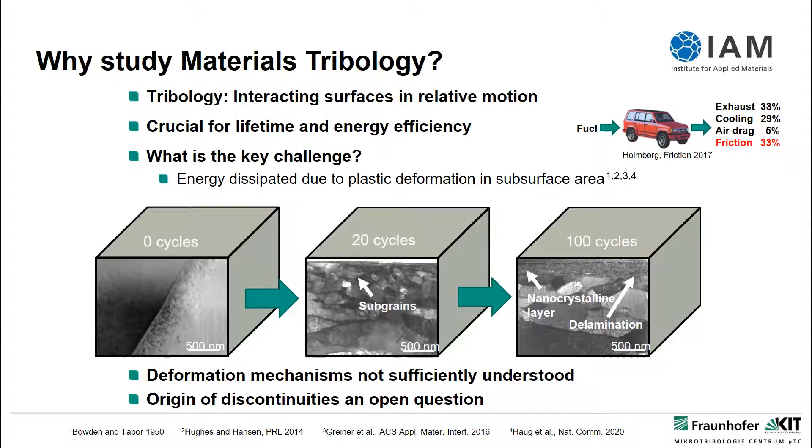So we have a sapphire sphere which is in contact with high purity copper. It's an unlubricated contact. We control the environment it is in. What I will show to you today, it's all in 50% relative humidity air at room temperature, and we do a really mild tribological load. So we have a sphere which has a diameter of 10 millimeters, so 1 centimeter, and a normal force of 2 newtons, which equals a nominal Hertzian pressure of 570 megapascals.

And as I'm sure a couple of you have already seen, actually a while back, by performing experiments like this, we stumbled upon the following phenomenon. So what you see here is a cross section. We are now looking from the side into the wear track, basically, right? So here's the surface, and this is where the sliding is happening. And our sample preparation method is such that we electropolish our copper samples after annealing them and grinding and polishing them. There's electropolishing steps, so we have a very, very low defect density structure to begin with.

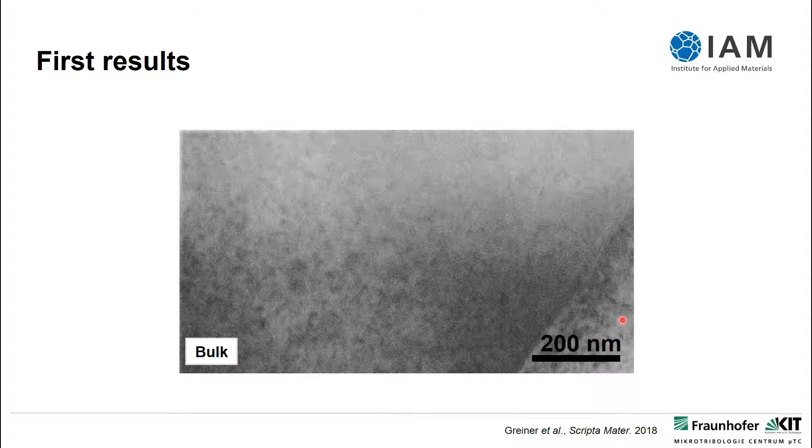And now if we just slide the sapphire sphere once, in this case now from right to left over the sample, the following is happening, as you can see here. We'll just do this again. So let's slide again. So the sphere is coming in. And this is now the TEM foil after the experiment, after just one trace. And you can see this discontinuity here in the microstructure. There's this dark contrast, which is horizontal to the sample surface.

And as I'm also sure a lot of you have already seen in the past, so I will not go into too much detail here, we have figured out that what we see here is the self-organization of dislocations. So this line, if you use high-resolution TEM, results I'm not showing today, and if you really zoom in, you see that this is a structure which is made out of dislocations. That's why we call it the dislocation trace line. And it's really the self-organization of dislocations in the stress field of the moving sphere. And so I will actually show you a first idea how this might happen in a second.

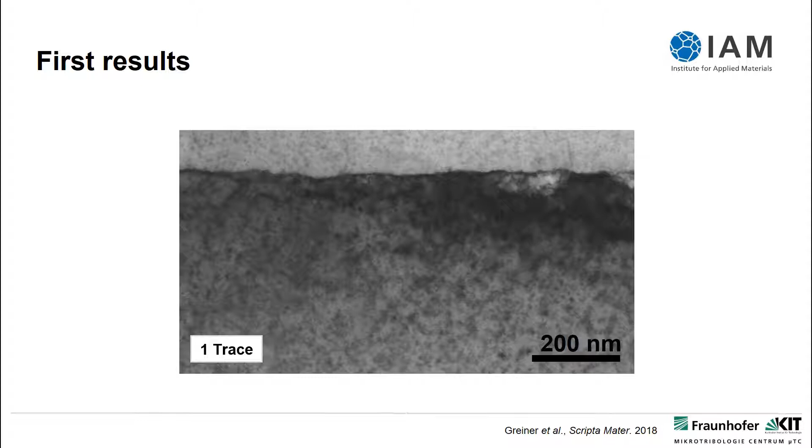So when we saw this for the first time, I was really puzzled by this. I could actually not believe it. I thought it's an artifact basically from the preparation, which it is not. It's not an artifact. We have reproduced this time and again. And if it's a mechanism, right? If it's a deformation mechanism, it should actually also be possible to see this in other materials. It should not be something that is copper specific. And that's something that we have quite a bit tested in the recent months and years. And so I want to show you 3 examples for other materials where we have seen this. So we have, for example, looked at copper manganese alloys, something we published in Acta this year.

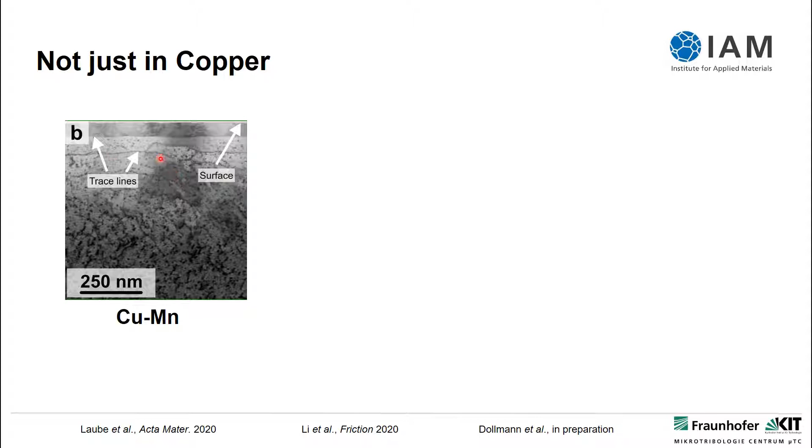And there we also see dislocation trace lines, actually several of them, but the trace line phenomenon is also there in copper manganese alloys. The same is true for copper zinc, in this case now copper zinc 5, where we do see the dislocation trace line. If we go to higher zinc contents and thereby lower stacking fault energies, the picture does change slightly.

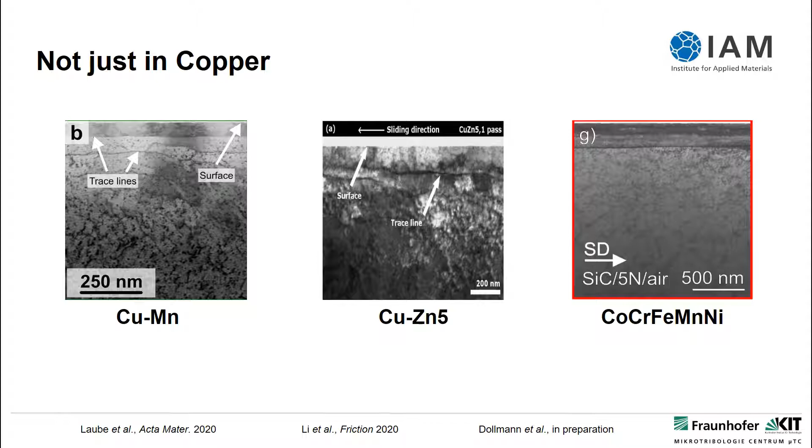And we have also looked at, for example, a high entropy alloy like the Cantor alloy, cobalt, chromium, iron, manganese, nickel, where we also see, here you can see it, a dislocation trace line, actually a really sharp, nice dislocation trace line. Here it actually heavily depends on the counterbody, but under certain conditions, when the plastic deformation is not too high, when we don't get a lot of adhesive wear, we do see a dislocation trace line. We have also looked at BCC materials like iron or tungsten, and also there we do see this dislocation trace line phenomenon.

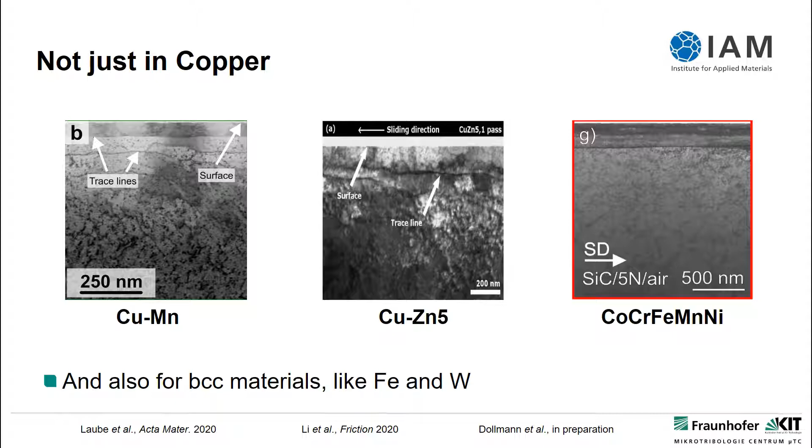So it seems to be really a mechanism that you can find at least in a certain range of stacking fault energies in other materials, not just in copper. So the question might arise, well, why is this happening? And I also would like to give you here what our first idea is into this phenomenon. That's something we developed together with Lars Pastewka. And again, because it's something that we published 2 years ago, I don't want to go into too much detail. I want to have enough time for our new results, but I need to introduce this phenomenon for those of you who have not seen it yet, because otherwise it might be pretty puzzling.

So what's plotted here is the Hamilton, or Hamilton-Goodman as some people call it, stress field under the moving sphere, which is basically a moving Hertzian contact. And what we are looking at now is edge dislocations which are oriented in 4 different ways, either like this, this, this, or this. And the question that we are posing is, how are those dislocations reacting to the stress field? And we are looking at this component of the stress tensor, which is the shear stress in the XZ plane, basically, of the sliding sphere. It's really, again, this cross-section.

Well, dislocations like this will be pushed in front of the sphere because of the negative shear stress. Basically, the sphere is moving them in front of it like a snowplow, so to speak. Those dislocations here are moving to the right and are just following the stress field. Dislocations oriented like this will be pushed towards the surface and will leave the crystal. And the most interesting ones are these edge dislocations oriented like this, because they will be pushed down further into the subsurface material, but as sliding progresses, these dislocations will cross over the zero shear stress line, which is this solid line here, to the positive shear stresses and will be pulled up towards the surface again.

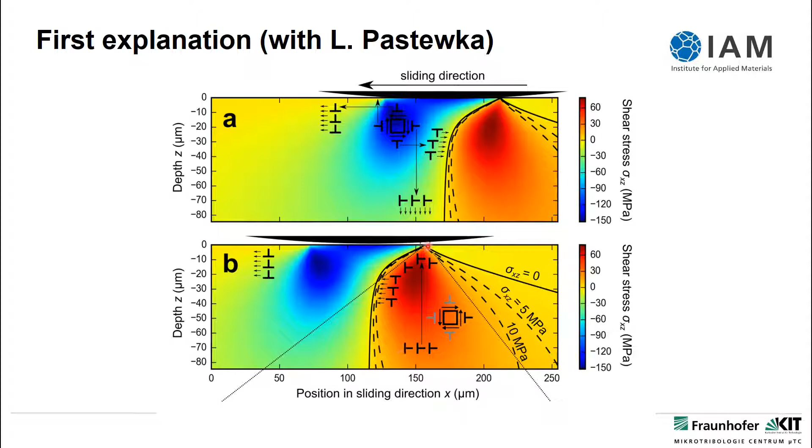All other dislocations we don't really have to look at. These are the really interesting ones. So what is happening to them? Are they sucked completely to the surface? And the answer is no, actually they are not. Because if you now see where, for example, an iso shear stress line for 5 megapascal is, you can see that the dislocations will not move completely to the surface because you need a finite stress to move a dislocation, right? And if you look in literature, actually old literature from the 60s, 70s, you will find that you need in really well-annealed copper a minimum shear stress of around 5 megapascals to move a dislocation. That's why we plot here the 5 and 10 megapascal iso lines.

And so basically what we are assuming is the dislocations are sucked up or pushed towards the surface, but not completely to the surface. So they will stop moving here, and that's where they will self-organize into this dislocation trace line. And if we look at the depth under the surface where this is happening, it's roughly 150 nanometers, which is also where we experimentally observed the dislocation trace line.

And so with this in mind, we posed hypotheses, if this picture holds true, if this might explain certain experimental results that we had seen. And you can read up on this in our 2018 Scripta paper. I don't want to go into detail now, but this very simple model, which for sure is not completely correct, I'm not claiming that, basically holds true for many of our experimental results. So we like it.

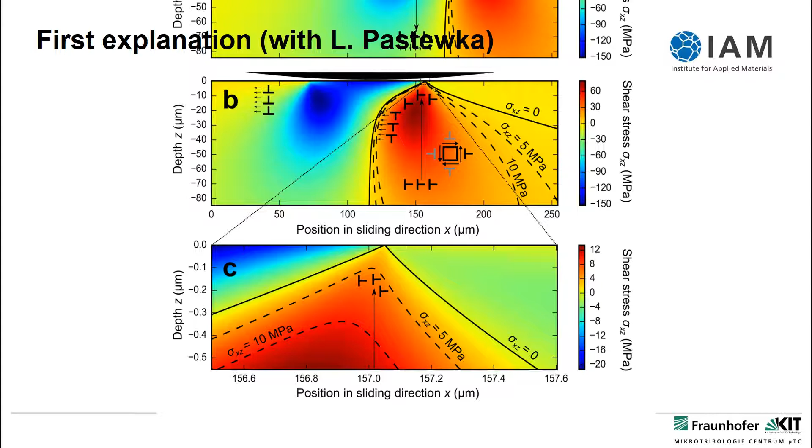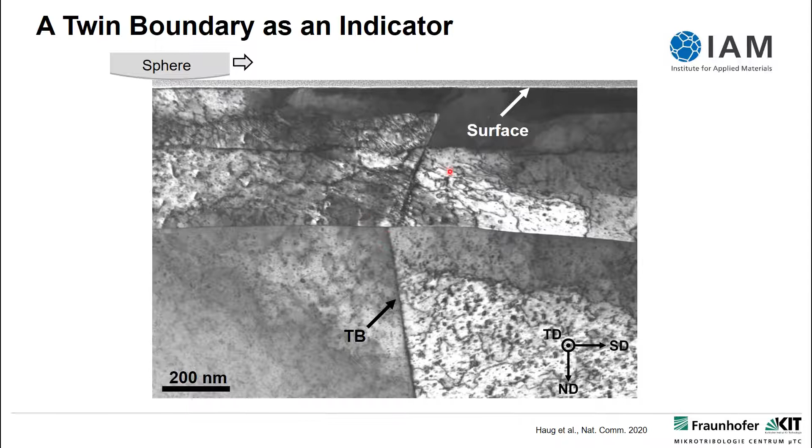But no more after the tribological load. After the tribological load, this twin boundary is tilted. It's tilted in sliding direction. That's what we can see here, to a degree of alpha. So we have tilted the twin boundary in sliding direction. We also see this dislocation trace line phenomenon, actually two, a lower dislocation trace line and an upper dislocation trace line. What else do we see? Well, we see that we don't just tilt the twin boundary, there's a step. We also shift the twin boundary.

And now what this twin boundary actually allows us to do is, this is something like an indicator or a silent witness to the processes that have happened under this one trace. Processes that, if we look at a structure without a grain boundary, as I have shown you before, we might have missed. So the question is, can we make sense of what we see here? Because this to us was really surprising. When we stumbled upon this, we were like, oh, what's going on here? We need to have a closer look, because this might hint towards mechanisms where we have so far only seen this mechanism for the dislocation trace line phenomenon, but perhaps there are actually other mechanisms at play.

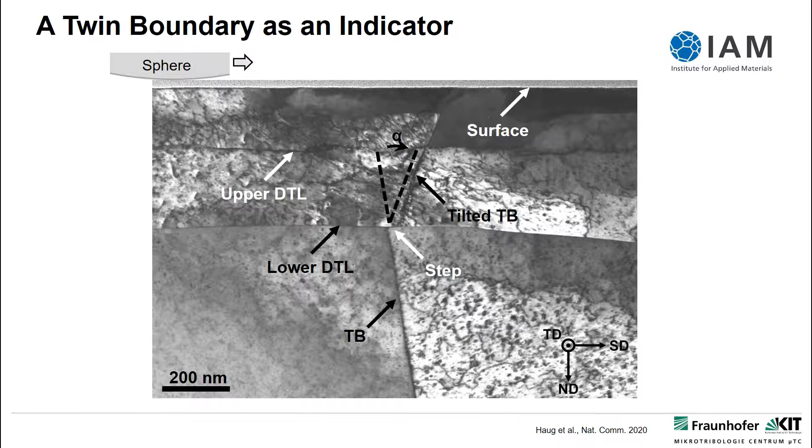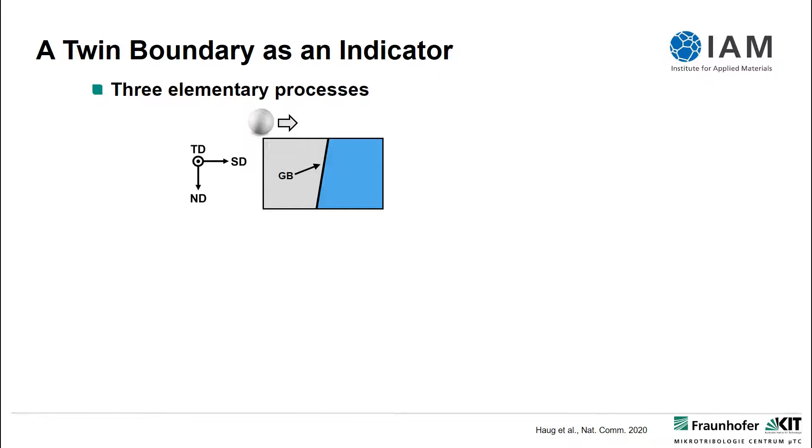And so what we can infer from this TEM foil, in our opinion, are three elementary processes. The first one is this tilt of the twin boundary. So there is a crystal rotation also accommodated in the transverse direction by the dislocation trace line. After the sliding, that's exactly what we see here. We have the dislocation trace line, and the material above it is rotated around an axis going in and out of the screen, in sliding direction. That's also something that we had seen previously and which hints towards the character of the dislocation trace line as a small angle tilt boundary. So this is the first process, and that's something we have seen in the past without the witness of the twin boundary.

The second one is what we call simple shear. So we shear the area of the material above the dislocation trace line. In this case, if we go back to the experimental results, above the lower dislocation trace line in sliding direction. So there's a simple shearing of this material, like a deck of cards basically.

Even though of course this is a dislocation mediated process, it's not a deck of cards, but you can think about it like a deck of cards that you shear in sliding direction. And this is what we see because of the tilt of the twin boundary. And then we have the step, which means that there's a highly localized shear happening at the lower dislocation trace line in sliding direction. So we move this whole material above the trace line in sliding direction. This whole deck of cards as a whole is now moved.

Well, what processes in the material, what elementary processes might be behind that? Well, the first one, so this formation of the dislocation trace line and this rotation around an axis perpendicular to the screen is something that might be accommodated by edge dislocations which have a net character like this, or more like this if we have a sliding from left to right. The second one basically are edge dislocations which are either oriented like this or like this, because they just pass through the material parallel to the sliding surface.

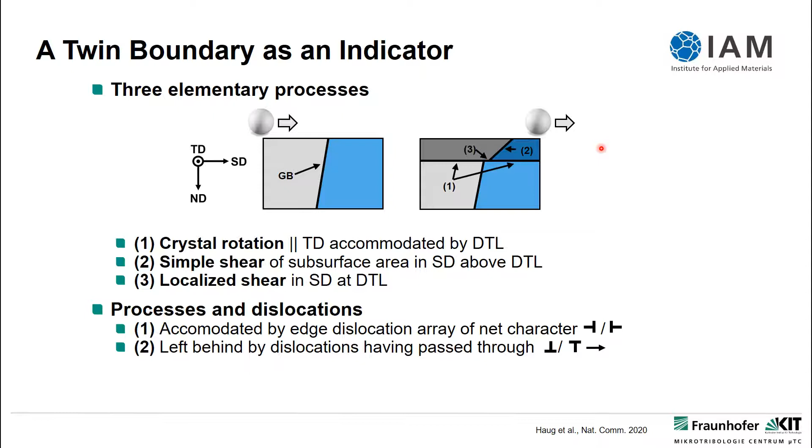So if I move the mouse like this, right, it just moves through here and does not leave any trace behind other than moving the twin boundary. So again, without the twin boundary, we would not know of this process because there is no way post-mortem to know about this. And it's the same type of dislocations, but highly confined at where the dislocation trace line is, that is responsible for this highly localized shear.

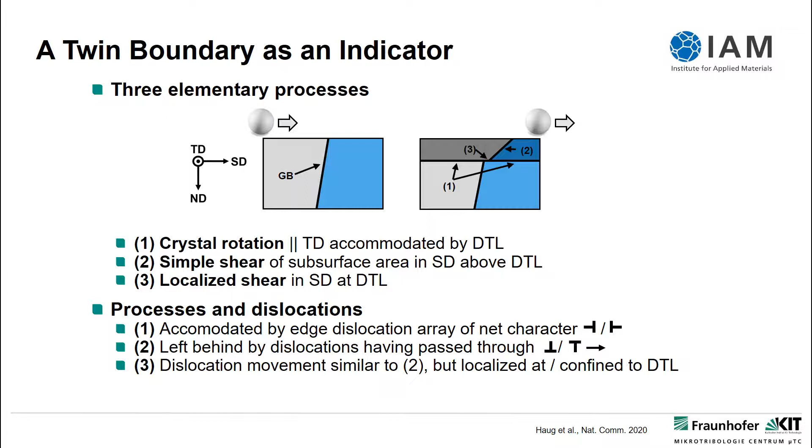So now that we, in kind of like a thought experiment, have identified those processes and dislocations which might be behind this, the question is, does this make sense? And in order to gauge this, we actually asked colleagues of ours at KIT for help. And what we did here is we looked at this TEM foil by a method that's called ACOM. That's automated crystal orientation mapping. So that's basically mapping diffraction spots with a very high resolution on the TEM foil, and by doing so, getting information about the crystallographic orientation inside the TEM.

And this is what you can see here. So this is the ACOM result, color-coded in transverse direction. And you can see here the inverse pole figure. So a red color corresponds, for example, to a 100 orientation. And what we see above here, this green color code, that's the platinum that is deposited prior to cutting the TEM foil inside the focused ion beam. That's the electron beam deposited platinum in order to protect the surface or the entire material from beam damage while cutting the TEM foil.

And what we do see is, yes, we do see different colors left and right of the twin boundary, and also here where this lower dislocation trace line is, there's a change in color from below to above. And now let's see if those three processes make sense. So this highly localized shear. We can ask the question, how many dislocations do we need to get this? Well, it's a shift of 40 nanometers.

That's roughly 160 dislocations with a standard Burgers vector for edge dislocation in copper. And that makes sense, right? It's perceivable that there are 160 dislocations highly confined moving at the lower dislocation trace line. If it was just one, we would say, that doesn't make sense. If it's a million, it also does not make sense. But to move 160 dislocations in this very beginning of sliding, that kind of makes sense.

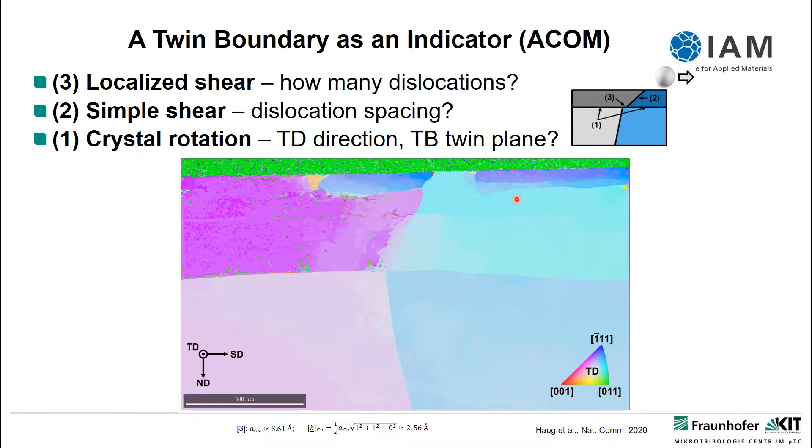And so that also makes sense. We actually see this. The other thing we wanted to see is, well, what about the twin plane? What about the twin? Do we destroy the twin in this process? Because again, if we stay in this picture of a deck of cards, we would really just shift the twin plane, or the twin itself. We would not destroy the twin, we would just tilt it.

And the way to look at this is to look at the twin plane normal vectors. And those we can figure out from the ACOM data, and we can do so below the trace line, and we can do so above the trace line. And let's just look at them and see what that is. And so we see that the twin planes, or these are the vectors of the normal vectors of the twin, and we can do this from the left and we can do this from the right.

But basically the main result, without going into too much detail, because I actually see that I'm going a bit long here for this talk, but I hope you bear with me, is that we have a misorientation between what would be the ideal normal vector for a twin like this in copper and the one we get experimentally of somewhere between 2 and 5 degrees. And there's not a big difference between below the trace line compared to above the trace line.

So basically we have a more or less ideal twin experimentally below the dislocation trace line, and after the simple shear above the trace line, we still have a really nice perfect twin. By the way, it changes a bit above the higher dislocation trace line there, the twin character gets a little bit lost. But this would be going into too much detail for now.

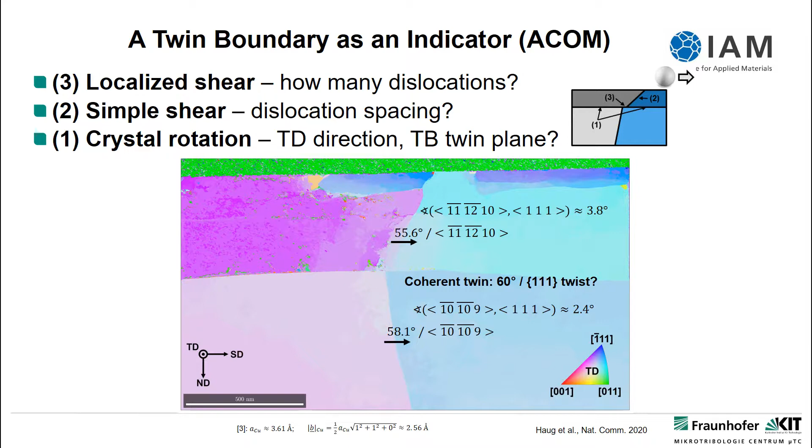And with this, I would like to conclude. What I wanted to show you is that this dislocation trace line formation that we reported on more than 2 years ago seems to be really a mechanism, because we find it in a range of different materials, not just copper alloys, but also high entropy alloys, and also in materials like iron or tungsten. And with the help of this twin boundary as a marker, as a silent witness to the processes that are happening while the sphere is sliding and that we cannot look at in situ, we have identified that there is

a simple shear happening. So like in this picture of a deck of cards, we are shearing the material in sliding direction. We have a highly localized shear at the location of the lower dislocation trace line that we have identified in this TEM lamella that I talked about at length in this presentation. And we also find this crystal rotation around an axis that is out of plane, and I didn't talk too much about that, but it's also in line with what other researchers in the literature have identified. The processes that we have identified seem to be physically reasonable.

When we look at the ACOM data, they seem to make sense. And the dislocation trace line formation, that's also an interesting result. It's not impeded by the twin boundary, so it really just seems to go through the twin boundary. And that's also something we have seen when we look at specific grain boundaries. This is how this work goes on for us, that we are now looking, for example, also at bicrystals, where at different angles we can slide over specific grain boundaries, and we are also looking at twin boundaries in more detail, even as we speak.